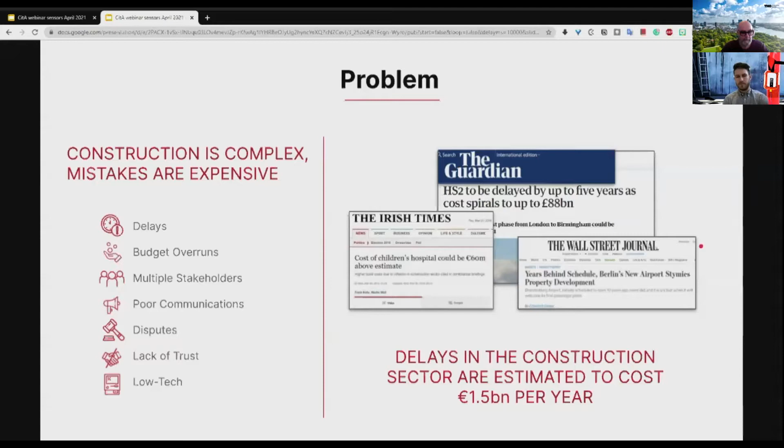As you surely know, construction is one of the biggest industries in the European Union. You might not know that it contributes directly to 9% of the European Union's GDP, and that 18 million people are employed in this sector. Therefore, there surely is a great market for technical and technological companies to develop and offer new innovations.

So the problem with construction is that little revenue is reinvested in R&D and in digital transformation tools. This might be due to the fact that there are certain ways in which we have all been working for a long time. We are risk averse. We want to make sure that the job is done. But it is not really efficient.

I'm afraid that from the little revenue construction companies are making, and the small margins that are there, as much as 5% of revenue is lost on rework. So there is, unfortunately, a lot of waste and a lot of potential to fight this waste. It is estimated that delays might cost 1.5 billion per year globally.

Now, as we are watching in the manufacturing sector right now, manufacturing is moving into Industry 4.0. Industry 4.0 is about machines talking to each other. It's about automation, it's about robotics. It's about eliminating all possible human errors from the process and producing something as repeatable as possible.

Unfortunately, even with 3D pictures, we are still working in the realm of imagination. And every person, even seeing the drawing as it is, the 3D render and the visualization, might interpret it in reality a bit differently. Therefore, there is still a lot of potential for errors and delays.

What we are moving towards these days is drawing real-time data and having common environments for our technologies so as to see the progress and the situation on the construction site as clearly as possible.

Now, in order to see the reality, the best way to capture the big picture, the best way to capture the reality, are construction cameras. There are different technologies available.

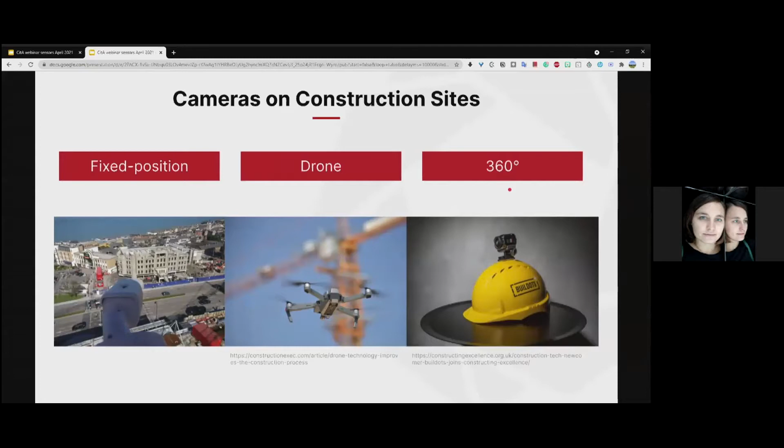So there are fixed position cameras. There are all kinds of drone technologies that, as I hear from Alan, you'll also be talking about in the nearest presentations. There are also these 360 degree cameras where you have all kinds of workarounds to register the current state of play.

At Evercam, we are focusing on the fixed position cameras. So we locate one, two, sometimes more cameras around the construction site in order to continuously record what's happening there. And this recording is then stored in the cloud, and we put quite a few interesting tools on the videos so that you can see your project better.

Now, why are we doing this? What is our driving force? We believe that when people have clearer visibility of the project, they can also communicate better, and with better communication, we have better progress, better productivity on the construction site.

So what does productivity mean? It means something else for each role on the site. We have the project manager who wants to know what the current progress is. We have the quantity surveyor who wants to know what is delivered and when. We have the health and safety engineer who is interested in reducing accidents, and if they happen, resolving the issues as quickly and efficiently as possible.

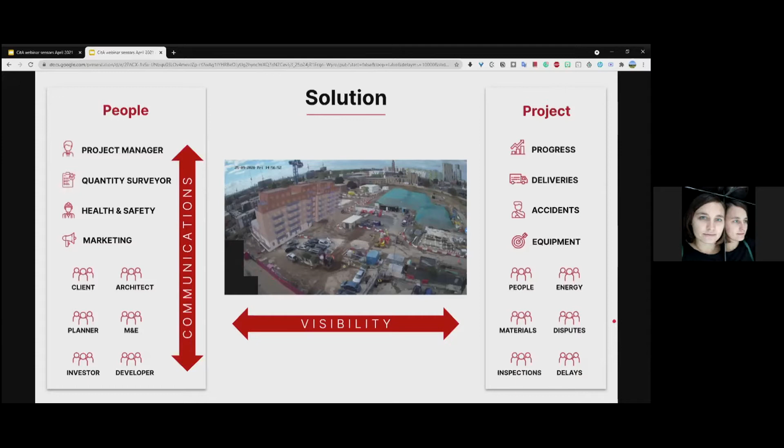Now, the functions that we offer at Evercam, I will slide through them quite quickly. I believe that our brilliant salespeople are much better at presenting these functions, but I would like you to know a little more about what the product can do, what our service is.

So first of all, you have the live view, meaning you can constantly look at your construction site. You can at any moment have a look at what is happening at this very point in time. We record everything and store it in a secure cloud service throughout the project.

So if we install the cameras on day one of your project, you will have full documentation up until the moment the cameras are on your project. You can retrieve any given time, any given moment, at any point desired. So our main product is the marketing tool of time-lapse.

Many developers and many contractors want to have these beautiful time-lapse pictures that they can post around, that they can show their neighbors, that they can show to their customers, showing how the work is progressing. We are quite efficient and proficient at producing these time-lapse videos, and the dashboard also allows you to download them yourselves.

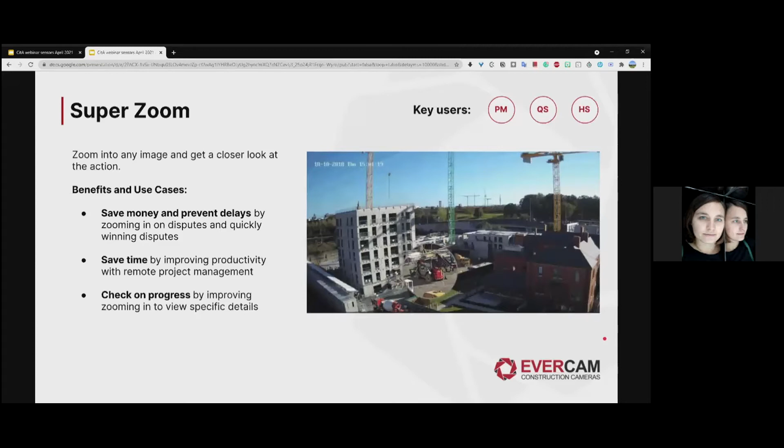There is a super zoom on our camera. The most common cameras that we use these days are 12 megapixel cameras, so you can imagine that the resolution is quite high and you can zoom in quite efficiently as well.

There is a nice tool for editing the pictures directly in the dashboard, marking issues or marking things to be done, and you can share these pictures easily with your subcontractors and with your team to support what you're asking them to do with a visual

proof, with a comment. X-ray is like a compare tool, but on a smaller area. In this way, you can look around the site and have a look, for instance, what's behind the wall, what's behind your facade, what's behind the pillar, because this was built, for instance, a week or two weeks ago, and you can have a look what was there done before.

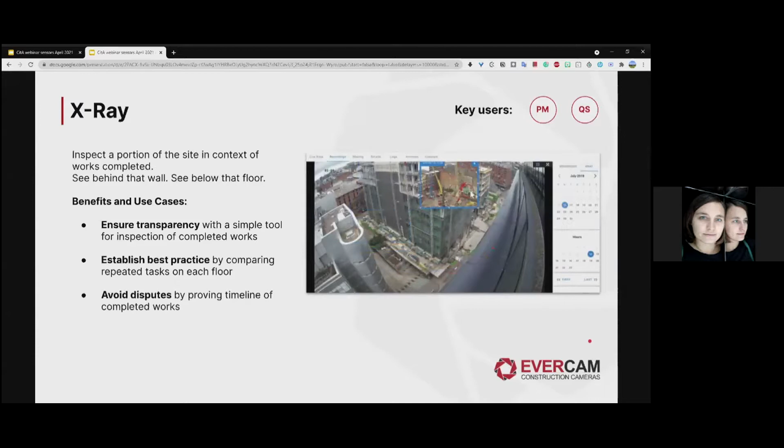Sharing is very easy. You can add an unlimited number of users with just inputting their email. And you can also schedule regular updates about your project by sending yourselves regular snapshots, pictures of the site.

We are integrated with some popular construction software, so that, for instance, if you use Autodesk on your site, you can swiftly send a picture from Evercam to your Autodesk suite in order to confirm certain events or document progress.

Now, there are some additional features that we are especially proud about. We have introduced the visualization of your BIM model so that you can see it integrated in the picture as one of the layers. It can be turned on and turned off, and in this way you can see what the progress is, where you are, how far you can go, and also by inputting the BIM model into the actual camera picture, you can market your project further.

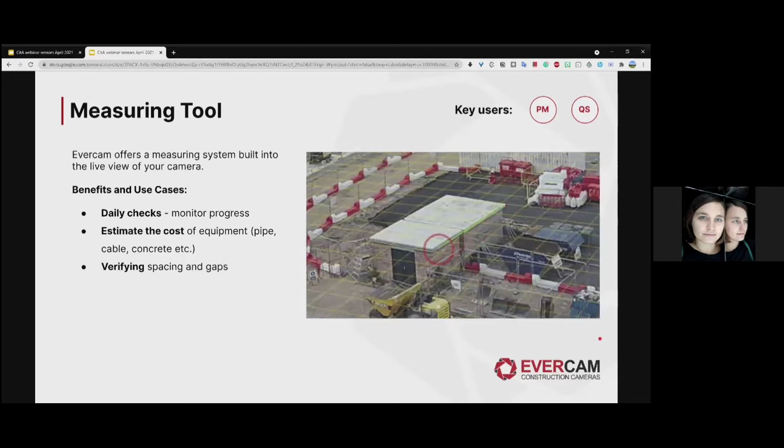Now, we have introduced tools based on machine learning and artificial intelligence into our dashboard as well. The first product based on automated recognition of vehicles on site is our gate report. This is an automated report which shows all entries and exits from the site. These entries and exits can be divided by the type of truck that you want, and can be used, for instance, by the quantity surveyor to check the invoices that they have received from a certain subcontractor.

Now, just a few use cases to show you how these features are applied. All kinds of health and safety incidents happen. Unfortunately, it's not like we can prevent them just now. But if they happen, we know that they can be resolved much quicker if you have a visual proof of what's happened. You can find out who's left this machine here. You can understand who was at fault, and you can also make your claims with the insurer much faster.

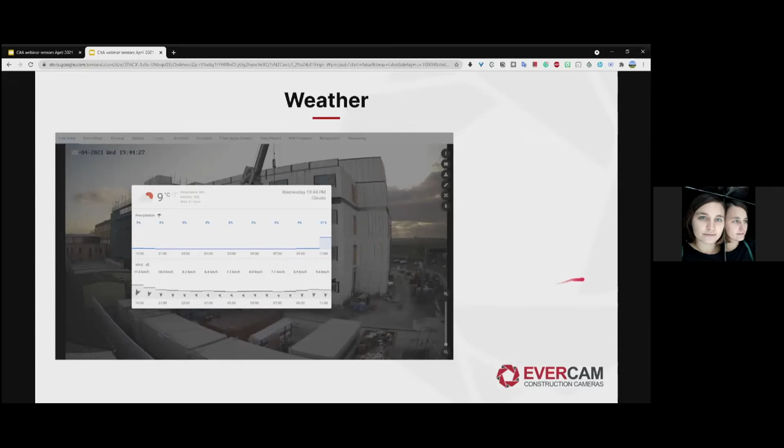Also, if our subcontractor told us, 'Okay, 3 days ago I wasn't able to do this and that because the rain was pouring the whole day,' you can easily verify this and document it both with the picture and with the weather data integrated here. So we are going further this way to integrate more and more.

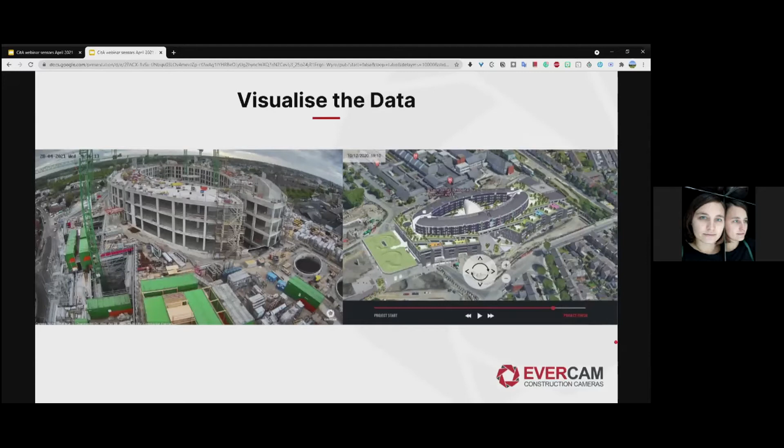But what is also important is that we want the data visualized in the camera. So in this way, we do not just look straight at what's happening. Where we want to arrive is that you have an all-around view of the site, just as if you had a constant drone footage, constant transmission from the drone, from your fixed position cameras. This is definitely where we are headed in the nearest years and months.

And where we would like to arrive at is a kind of a Google Earth experience for construction. So whatever you click, wherever you arrive, you can see more details. In this way, you can see how much of the structure is completed, what objects are on the site, and how they are counted, whether the machinery is operating, whether it has all the permits that are required. You can also detect breaches, see risks that are out there, and see areas that are closed or will be closed.

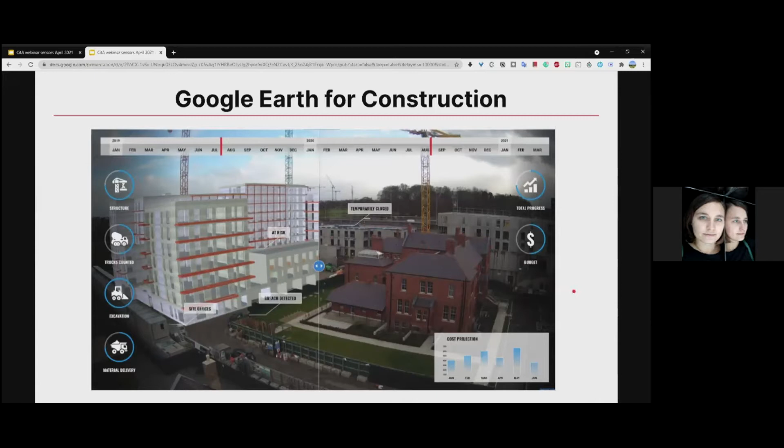This is our ambition for the nearest time, and for this purpose, we have entered into a DTIF project together with TU Dublin and our other enterprise partner, Gagamuller. Together, we will be trying to deliver this. We will be working the next 3 years to deliver this experience of all-around visualization, but also of integration with various sensors on the site.

Some of the sensors that Gagamuller is delivering will be mounted on the helmets to track the users, but they will be impersonalized. Therefore, we will stick to all the requirements of the Personal Data Protection Act.

So we are quite excited to embark on this project. We are very happy that the government has just decided to co-fund it, and we will be working on this for the nearest 3 years. Thank you very much, this is all that I wanted to share today.

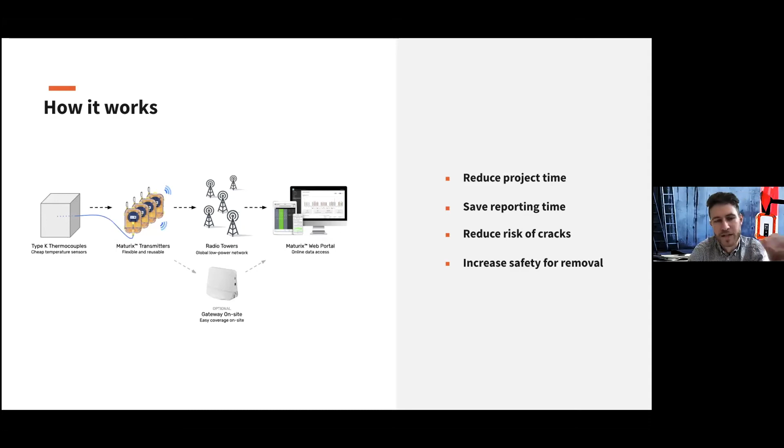And it looks like this, where we measure in the concrete and transmit data wirelessly and remotely, often with a data transmission of maybe 10 minutes from the concrete. We launched the solution for job sites in 2019, January 2019.

We also have activities in Ireland, especially with one client or partner, Matest, who's doing a lot of concrete testing in Ireland on many big constructions.

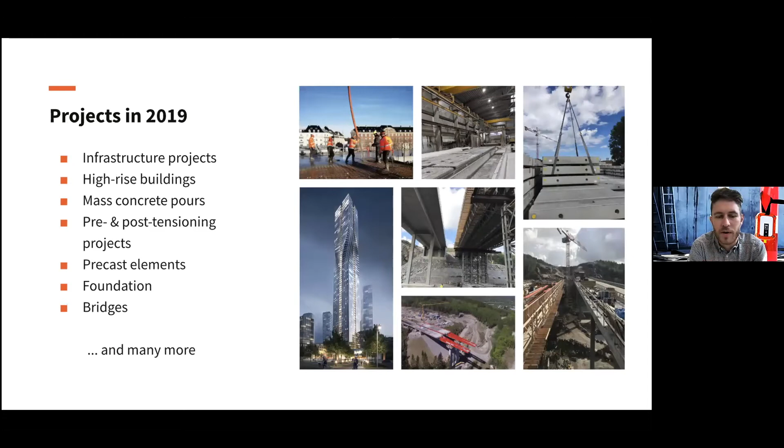And here are some examples. Our products are mostly used on big concrete structures, so bridges, high rises, precasting, tunnels, big foundations, mass pours, and so on. That's where you have the biggest problems and a lot of uncertainties, and where you want to measure with sensors. So this is where we are primarily used.

So I brought in, I think actually five, as I said before in the beginning, different ways that our clients are working with sensors to reduce the carbon footprint. So this is about the cement content.

It's about automatic adjustment of heating and dehumidifiers. It's about the reduction of use of concrete cubes and specimens, which is often done. A huge thing right now is also that in many countries you are implementing green concrete or low carbon concrete, where parts of the cement has been replaced.

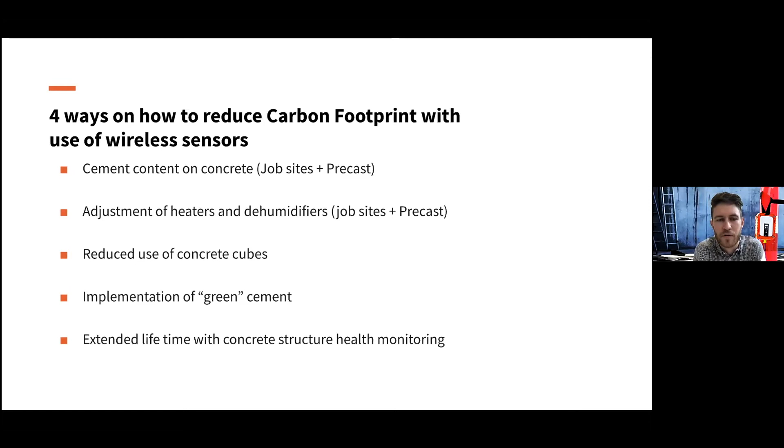And also a new thing that a lot of companies, building owners and municipalities are looking into is extending the structure, the concrete structure, for a longer time. And that basically is also about reducing carbon footprint because you avoid casting new concrete.

But I'll try to be quick, I know time is running fast. I think this was just an interesting chart.

I know it's in Denmark, but the chart on the right is new here from a couple of months old, where the Danish government did an analysis of the largest CO2 footprint companies in Denmark. As you can see, we have one cement manufacturer, Aalborg Portland, which accounts for a huge amount, more than the remaining 9 in our top 10 in Denmark. So I think that at least tells a lot about the CO2 footprint when it comes to cement, and it often counts for 7 to 15% of the concrete.

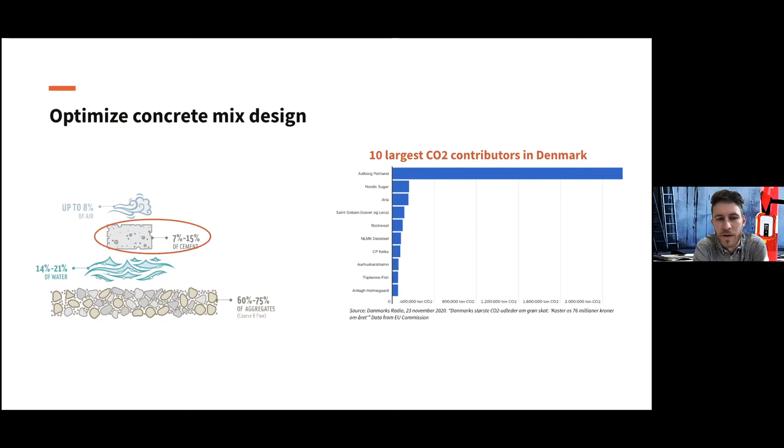What we often see, and where the biggest gains are, is that you have some targets you have to reach right in time. So maybe in 5 hours or in 12 hours you have to reach 5 MPa. In 4 days, you maybe need 25 MPa, and so on.

But what we often see is that because it's, let's say, not very transparent what strength we have in our concrete, it's often over-designed and over-engineered by both the engineers and the ready-mix supplier. Maybe the contractor needed 25 MPa, but just to be sure, everyone takes their safety margins, and we end up with a much higher strength than we need.

And the same on the precast side, where you have very fast demolding, you also often have huge cement content in your concrete. So what our clients gain a lot, especially when they start using sensors, is that when they embed them, they get full visibility or transparency of what our actual current strength is when we need it.

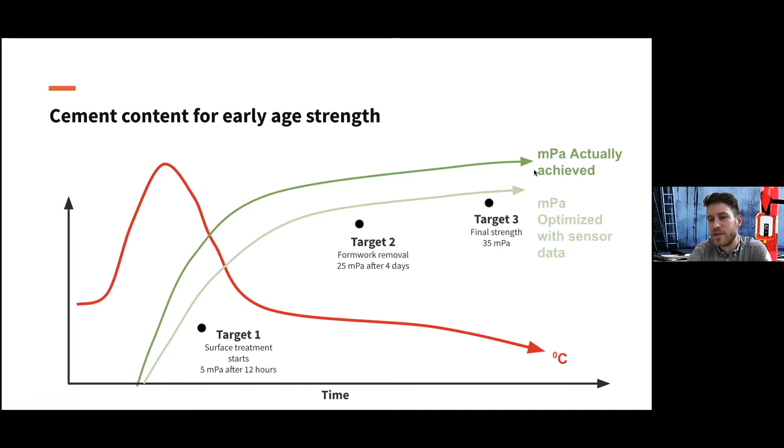And thereby they start learning, okay, can we go a bit closer to our safety margins, or closer to the target, without risking anything. So this is one big help the sensor gives, compared to if you didn't have any sensors, you didn't have any visible curves, you just knew that after maybe 28 days you would reach some kind of strength above the 35 MPa you need.

And the same on the concrete mix. On the precast side, we combine climate sensors, pouring temperature, and concrete temperature, integrating with heating, and then take all these factors into account to see how we can actually design a concrete mix that makes sense. You still reach your production cycles, and you don't risk anything even in the winter time when it's cold.

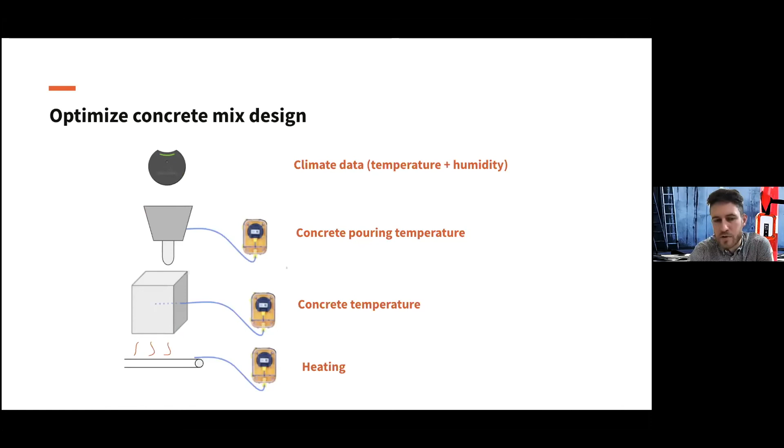For doing an early formwork removal, what we often see is that we are very far off on concrete curing time for different elements you are casting. You might have a 10-hour cycle, but your castings in the summer might reach target strength after only a few hours. So what we help with is to say, hey, you do have a lot of safety margin on top. Let's try to utilize that to reduce the cement content in your concrete mixes, going slightly closer but still without risking anything.

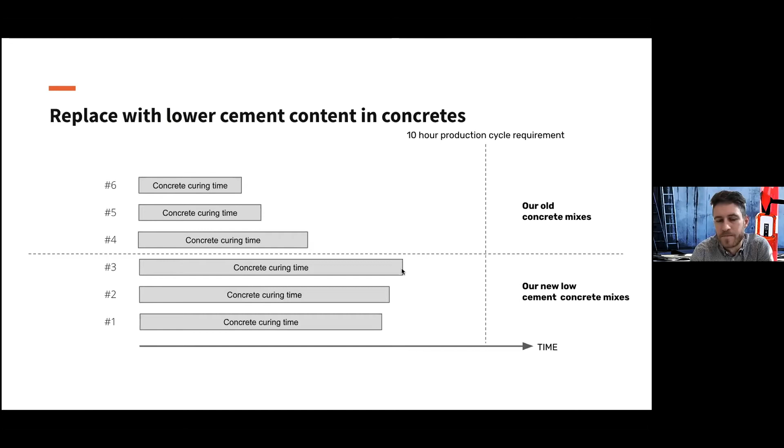The same with some of these new low carbon concretes is that we can see that many of them might have slightly higher curing times, but they still might be within your required maybe 10-hour production cycle. So this is some of the ways we see clients gaining when it comes to concrete mix design.

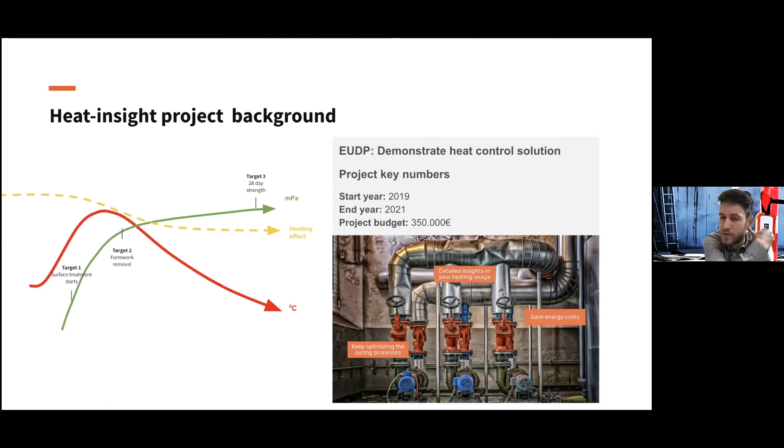We also see a huge interest both on job sites and at precasters to control the heating. In many projects, you actually heat up either the air around the concrete, or if you're precasting, you are heating the concrete from the concrete beds. We did a demonstration project recently where we started controlling this heating. So our data is gathered and then implemented with PLC controls, so we can actually start controlling the heating.

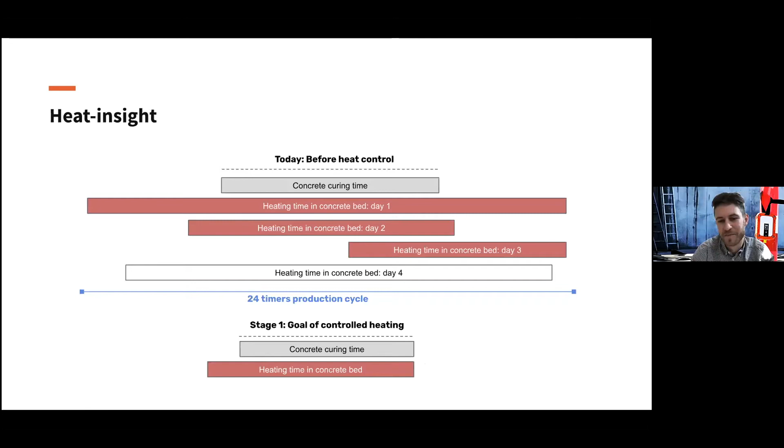So what becomes extremely visible for our clients is, hey, we might need to start a few hours before with some preheating, and then once we reach our curing time or current concrete strength, we can cut off the heating, because we've reached the target strength we need, so all the remaining time is just wasted heating. On some of the first demonstration projects, we've shown heating savings around 20 to 25%. When your total heating bill is more than €1 million, that's something you can count on both the CO2 footprint and your energy bill.

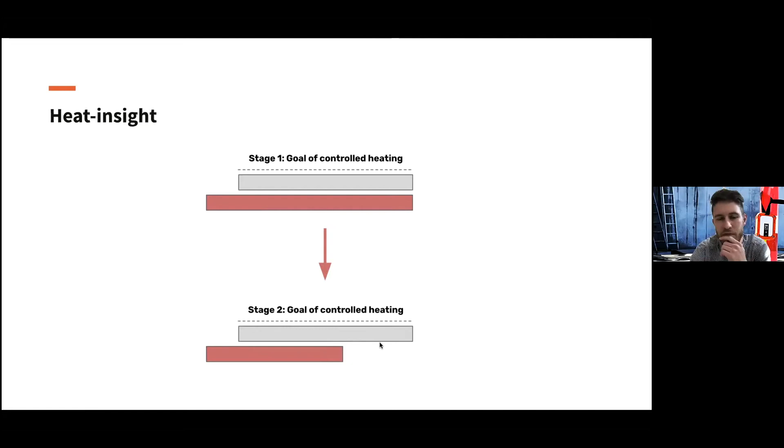Our goal with these controlled heating systems is to have temperature predictions of your concrete. If we know that at 6 a.m. in the morning you just have to reach 25 MPa, then we can maybe start controlling the heating, and maybe stop it even before we reach our target strength. So this is the goal of our work with the sensors and some AI engines.

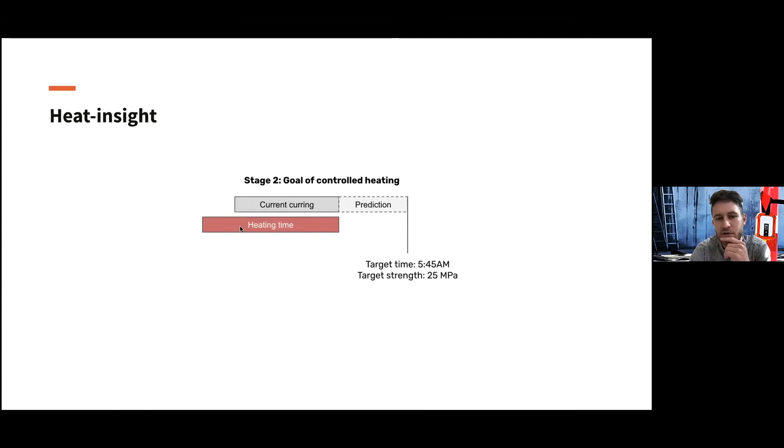Really, it's about predicting, saying, hey, your target time is 5:45, your target strength is 25 MPa, and we know with the current heating and the current energy in the concrete that you will easily achieve that in time. So there's no need for more heating in your concrete.

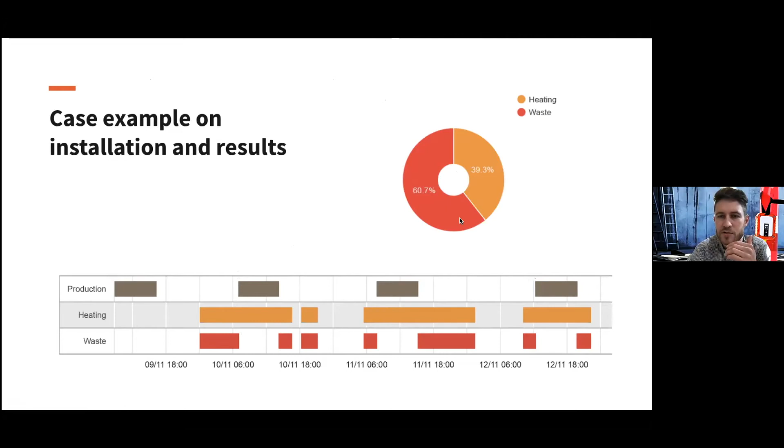Here are some examples of the predictions we do. Here's an example where I can see the production time every day, and here you can see how they actually heat it. If we just cut off the time outside of production when you don't need to heat, then in this case 60% of the heating was done when no castings were happening, and only 40% was done during actual casting. So this is some of the work where we're helping clients reduce these consumptions.

Many precasters work Monday to Friday, and the first people arrive again Monday morning. One very simple way we've been reducing cement content is to reduce it on the Friday concretes. You have 48 hours to cure a concrete, you don't need a concrete that cures in 5 hours. So 1 out of 5 days, you might be able to reduce the cement content a lot. It's a very simple, easy way to gain - if you have the time, why not use it?

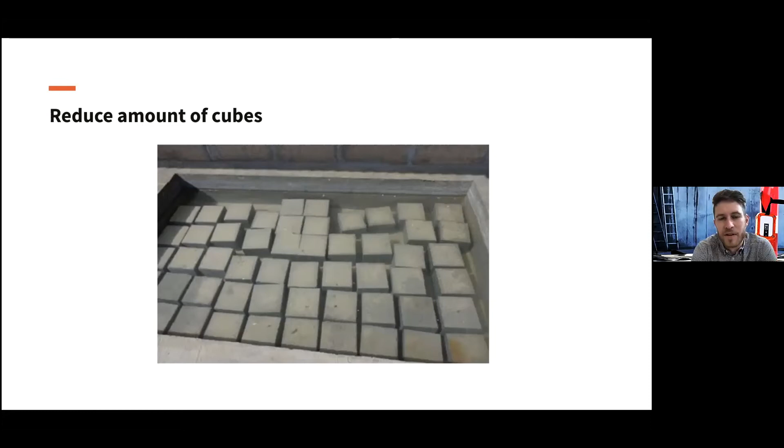That's both on job sites and on precast. We see many clients who want to reduce the usage of these specimens, either cubes or cylinders. There's actually a lot of specimens cast, and it's a waste of resources, time, and concrete. It's often hard to work with these specimens - you have to store them under controlled conditions, and remember to go and press them at a certain time. We believe it's much more efficient to just embed a small sensor instead.

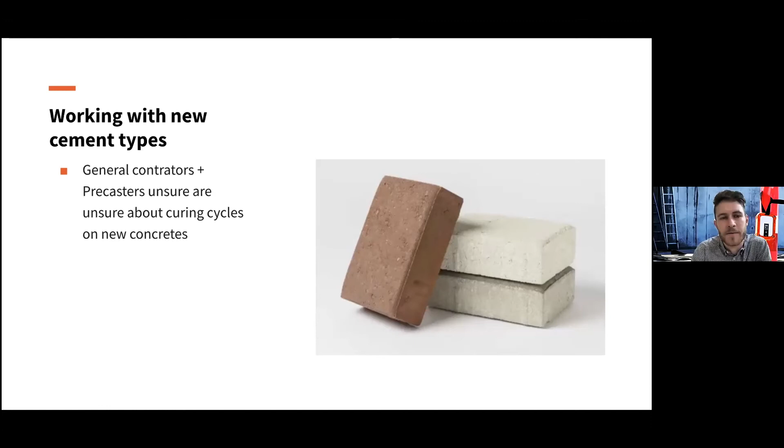I think that was the short, relatively short 15-minute presentation of how we and our clients are working on reducing carbon footprint and speeding up projects. The reference to SHM leads very nicely into Rob's presentation, which we'll hear in a minute.

I put a comment in the chat - many years ago, as a young engineer, one of my jobs was to do all the concrete testing. So does the technology today and the sensor installations potentially negate the need to take these cubes, slump tests, and send them to laboratories at local universities to get results back? Is it possible to do all that in real time?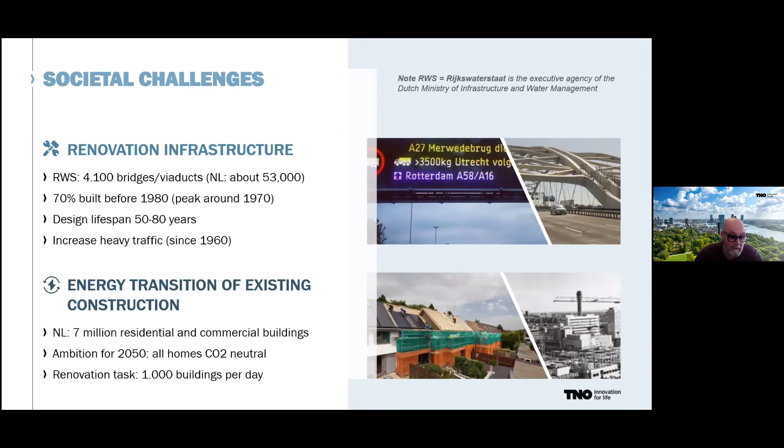So we expect that predictive twins will be used to replace and renovate existing civil infrastructure in order to predict the expected technical lifespan. This takes into account, among other things, the obsolescence of civil engineering structures and future changing traffic loads that are constantly changing. With these insights, maintenance, renovation, and replacement can be optimized at the construction and network level.

In the transition to a circular construction sector, predictive twins can function not only as a building material passport, but can also play an important role as a tool for monitoring and forecasting the technical lifespan, the quality of building components, and the behavior and technical lifespan of circular building components and materials. In new circular structures, this can be better demonstrated, giving an important boost to circular construction.

We have a couple of focus points within my cluster at TNO. One is smart measuring systems, and we are using them to look at behavior and the condition of structures, monitored by digital technologies such as sensoring and drones as well.

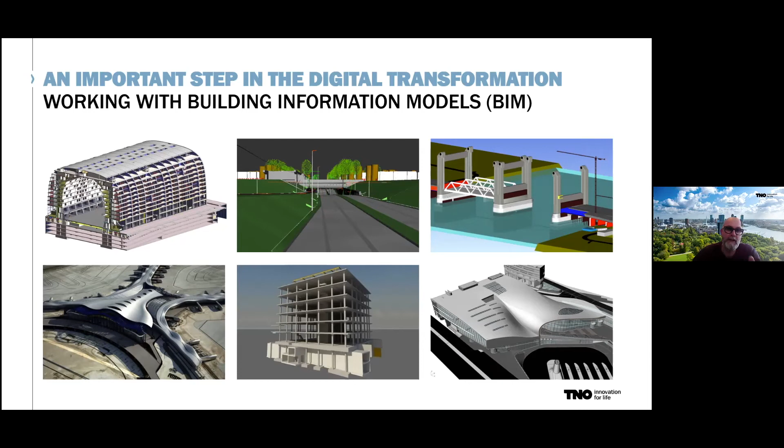So I think building information modeling is one of the first steps towards predictive twins. As I said, asset lifecycle information modeling plays an important role. And it's not surprising that the use of BIM is lagging behind in the management and maintenance phase of construction work. We often see it in the programming, design and engineering, and in the realization, but the maintaining phase, the actual use of the structure, is very important.

In that phase, we must combine BIM data from the design and realization phases of the structures. And many buildings were built years ago, and no BIM data is often available for these buildings from the design and construction phases.

So initially, BIM was mainly about making 3D models of structures. Nowadays, we see that 3D models and 3D objects are becoming less central in BIM development. Increasingly, it's about linking all kinds of data during the life cycle of a building in all kinds of formats. Data sources are captured, as we saw already with cameras and drones, and all those data sources need to be combined.

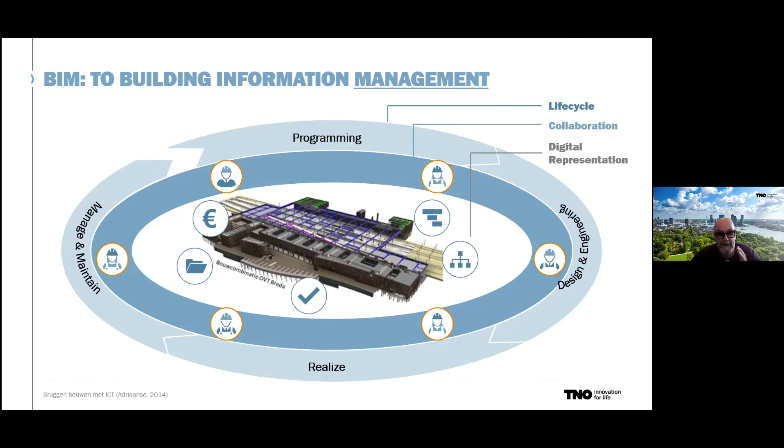So a building information model is often associated with a 3D model. And that's why more and more people are talking about building information management. That's more the object-oriented recording, sharing, and management of building information throughout the entire life cycle of the construction of a building.

What we see is self-measurement, which is what we do as well. We measure traffic load and stresses in the bridge with sensoring. And we actually have sensors that are listening to the quality of the weld of the steel construction.

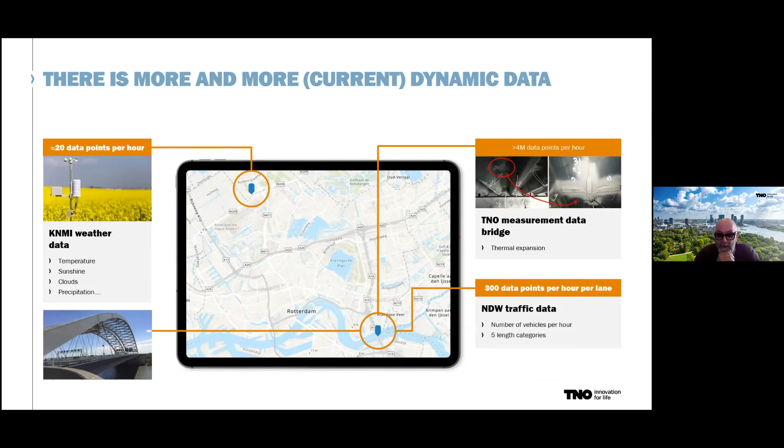And if you combine that all, we are going towards those predictive twins, and we go from measuring to forecasting. That's the realm of the predictive twin. So what do we understand by a predictive twin? That's a digital replica of a structure, such as a bridge, but it can be a building as well.

Or a composition of assets. A predictive twin assesses the actual state of its physical twin, and can also make predictions about the behavior of the physical twin. And that's a very important new element: a predictive twin continuously learns from the information it receives. Finally, a digital twin makes proposals for certain decisions, and we foresee that in the future, a digital twin can even make decisions for its physical twin.

We can do that on different levels. So you see construction level, component level, but network level as well.

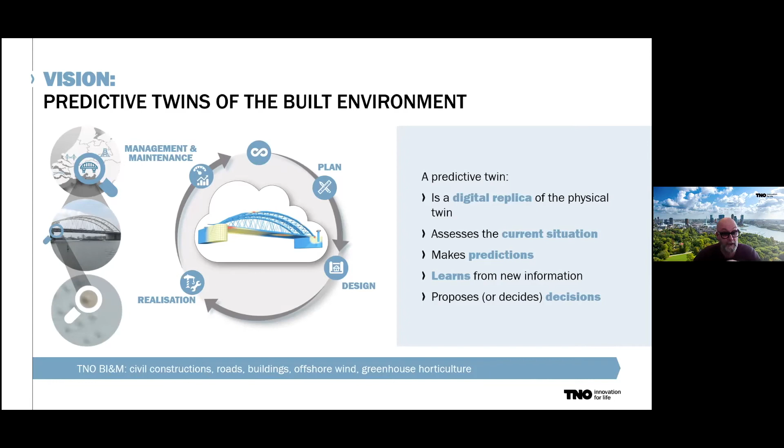If we are looking more specifically, we see three components that need to be integrated, and that's what we at TNO are doing for years already. First, we see the information component, we call that the ears and the eyes. Those are the measuring data, the building information models.

But secondly, we see the model components, which are the actual brains. So we are developing predictive models, part of the predictive twin, and we are creating learning models based on the data received by the predictive twin. We use machine learning techniques to recognize patterns in data.

And finally, we see the simulate and decide component, which you can compare with buttons or gauges. Here, future situations can be simulated, allowing predictions to be made and possible scenarios to be assessed. We are active on each of these components, and we are now also taking steps into the integration of this. We do that at those various levels, like I said, on a component, object, structure, build environment level.

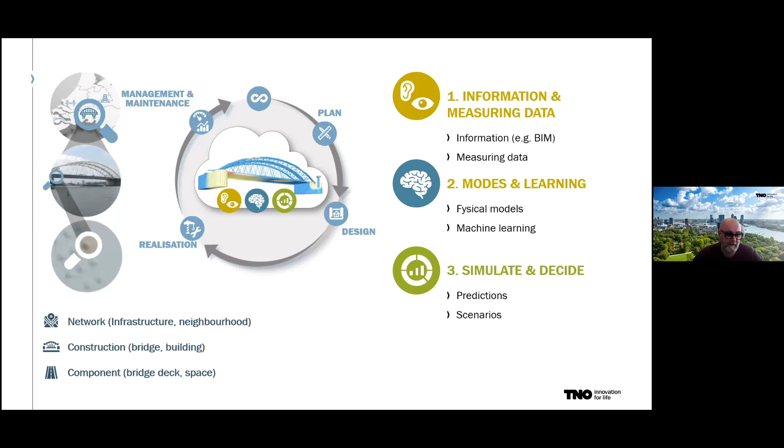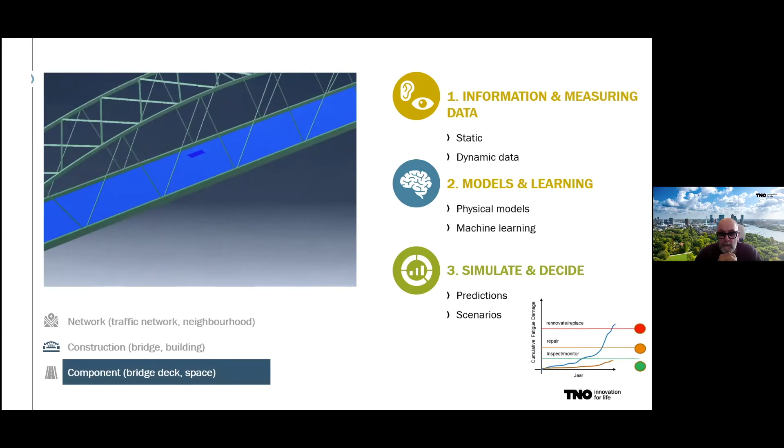I'm going a little bit more in depth there. Here you see the Van Brienenoordbrug again. We took a step last year with a predictive twin for critical bridge deck, in which the components mentioned are applied together. So it's one of our field labs, actually.

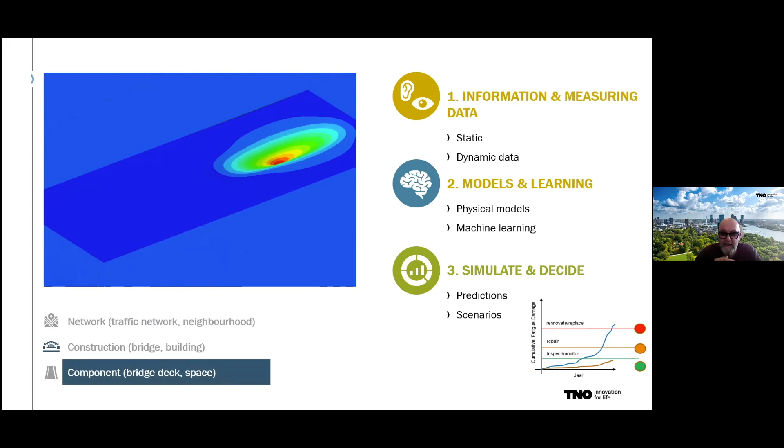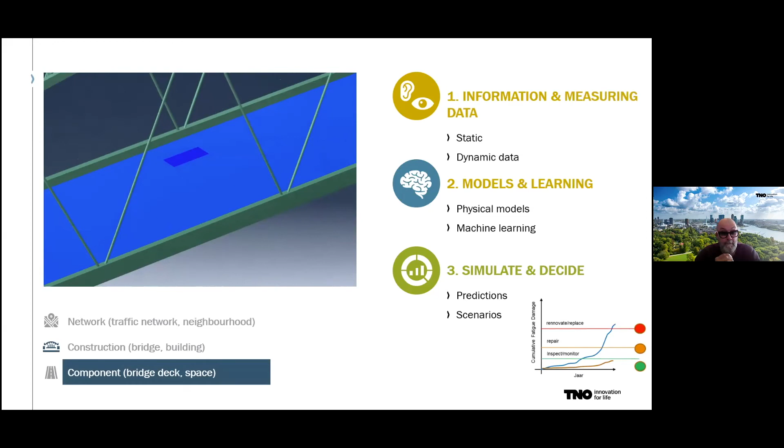Essential here was to get a better insight into the current and future condition of a specific critical bridge component, so that maintenance and replacement can be planned cost efficiently and with as little inconvenience as possible.

So we have developed a predictive calculation model for the bridge deck. In this model, all kinds of information are included, such as year of construction, traffic load, temperature changes, dimensions of component, structure, and amongst other things, the stresses in the bridge deck can be predicted with this model.

By linking this model to a crack growth model, predictions can be made about the occurrence of cracks in the bridge deck and therefore damage to this component. Here you see the schema for that.

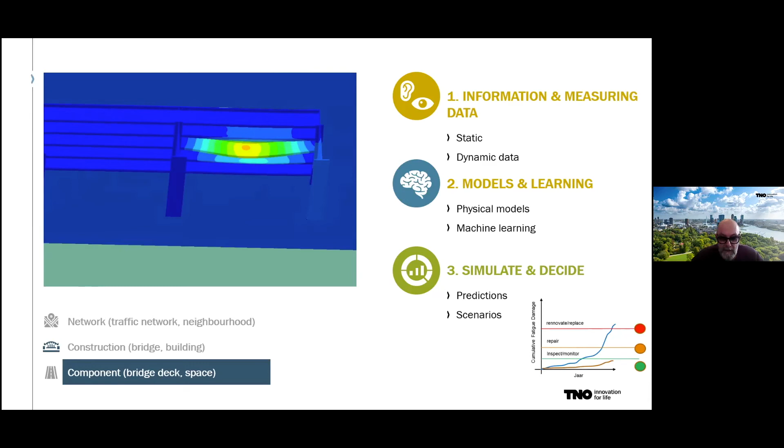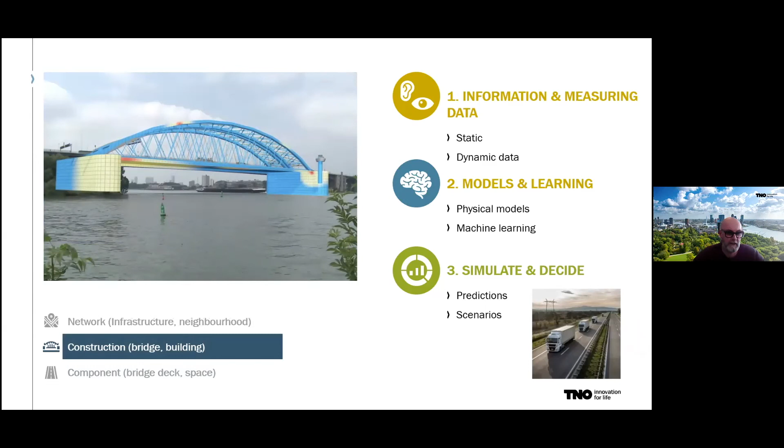But we can do it on a network level as well. We do a lot of measurement throughout our road infrastructure. We call that the project TNO Load Map, where we can see what the impact is if a certain construction is under maintenance.

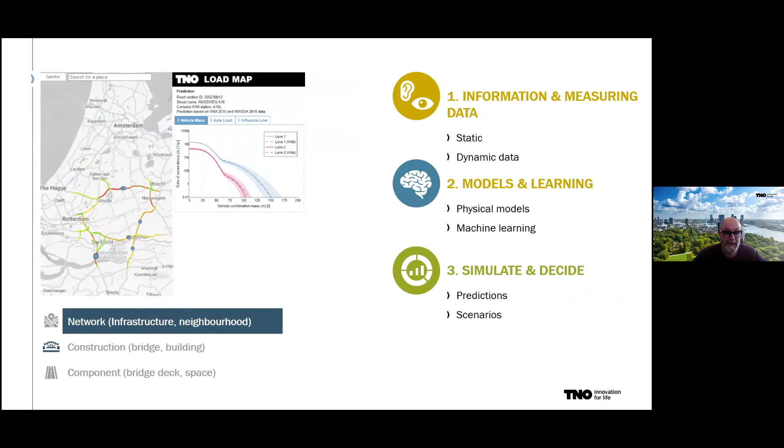I'm already at the end of my short presentation, but not before I mention a couple of conditions coming towards those predictive twins. It needs to be fit for purpose, so we don't need all data. I always say that BIM is a demand-driven process.

So you need to deliver the information to someone else so they can do the job better. And it's the same with predictive twins. Big data is sometimes overwhelming, so really, fit for purpose.

One other very important thing is that we need to integrate knowledge domains. So of course we need knowledge of civil engineering, but artificial intelligence as well, information modeling, open standards. And of course the different interests are very fragmented, but that's very common in the construction industry, that everybody has different models. And we think that owners like Rijkswaterstaat, our road authority, are really the driver behind these developments.

We published a paper last year, end of last year. It's now translated into English. It's not published yet on our website, but I can share it through CitA if you're interested. I can share it with Ellen, so Ellen can share it.